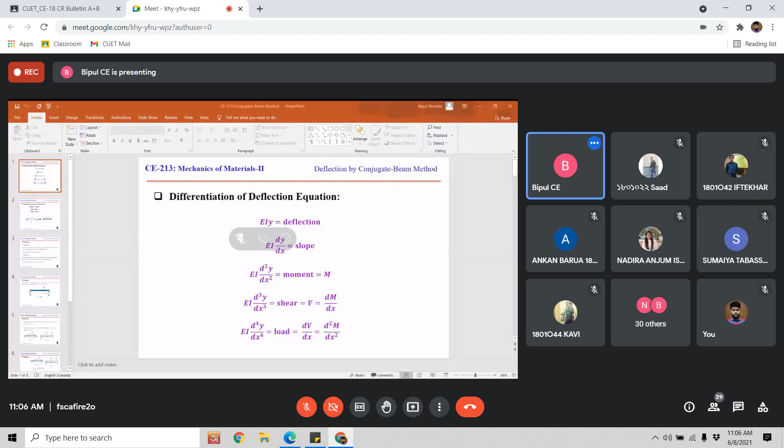Basically, is the slide visible to you? Could anybody respond? Yes, sir, visible. Okay, thank you very much.

Okay, so today I will discuss a new method to calculate slope and deflection, that is the conjugate beam method. It is another new method, conjugate beam. It is very much close to the area moment method. So I'll complete this method today, and next classes will be held on this method.

Okay, so if we differentiate the deflection curve with respect to the length of the structure many times, then what will we get? The first equation is the equation for deflection. EIY equals deflection. EI are the properties, one is material properties, another one is sectional properties, and Y is the deflection. So this equation indicates the deflection of a body subjected to applied load.

Then if we differentiate this equation with respect to x, meaning the length of the structure, we will get the slope of the deflection. So this equation gives the deflected shape of the structure, and this equation gives the slope of the deflected shape at different locations. Here we are differentiating this equation with respect to x.

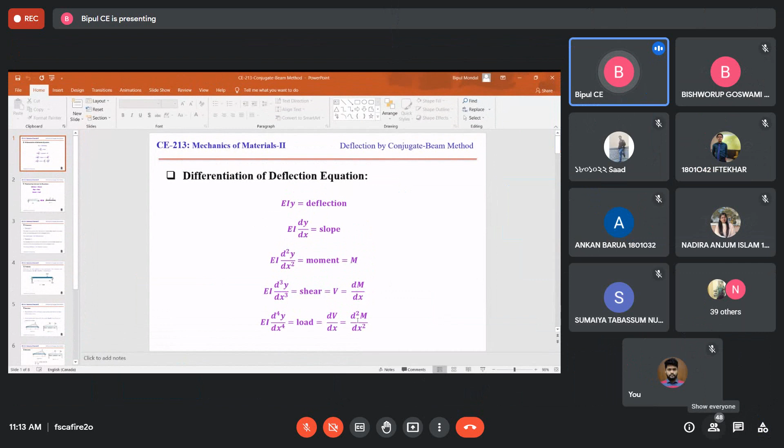In the real structure, it will be deflection, and in the imaginary structure, that will be moment. In the real structure, it will be slope; in the imaginary structure, it will be shear. In the real structure, it will be moment, and in the imaginary structure, it will be load. So the moment will be equal to the deflection, shear force will be equal to the slope, and load will be equal to the moment. So that is the relationship between the equations.

Say this is a real structure, and this structure is subjected to this load. Then we will draw the M by EI diagram of this structure for this load. Say this is the M by EI diagram acting on this beam. So in case of the imaginary beam or conjugate beam, we will assume that it is not moment, it is load. It is nothing but load. Load means, say, it is distributed load. It may be uniformly distributed or varying distributed, etc. But it is load. It is not the M by EI diagram.

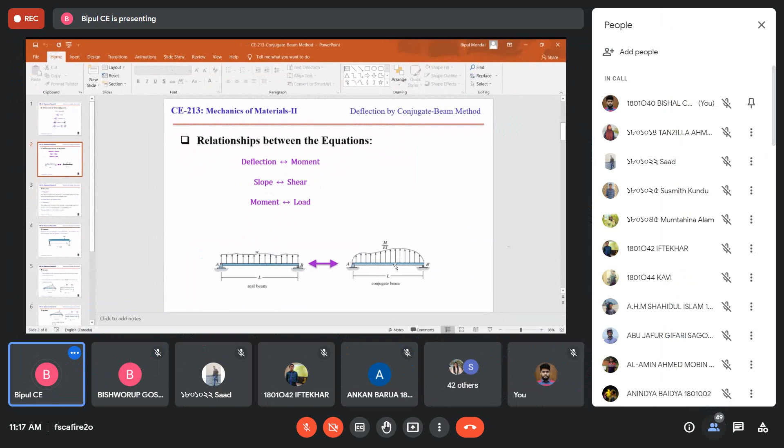First of all, say this is a real beam, and this real beam is subjected to this type of load. Then we will draw the M by EI diagram of this beam for this load. So that is the M by EI diagram. Then we will assume that this is not M by EI. This is the load acting on this beam. Then the shear force at any point due to this load will be similar to the slope of that point, and the moment of this load will be equal to the deflection of the point. Sorry.

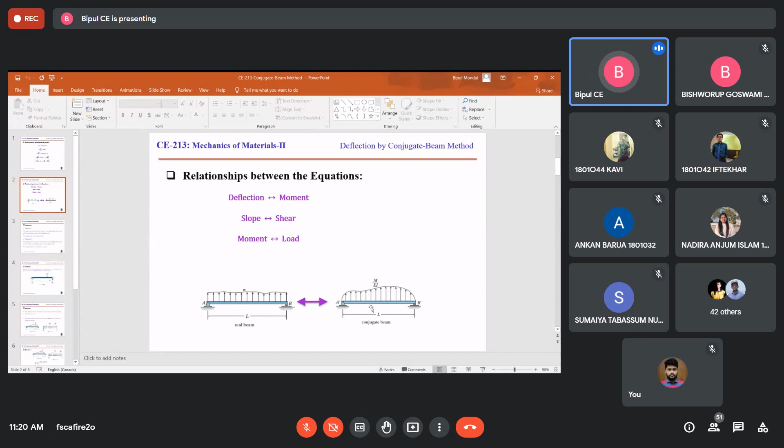The shear force will be similar to the slope, and moment will be similar to the deflection. Okay, moment will be similar to the deflection. And there are two theorems here, theorem 1 and theorem 2. Actually, it is nothing but what I was explaining, repeating.

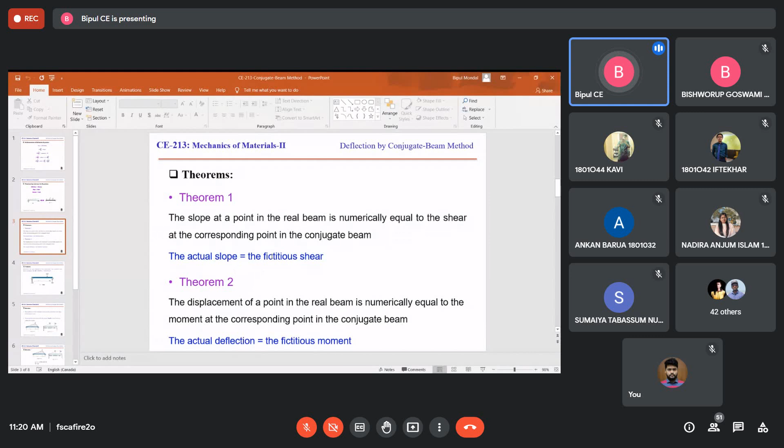The actual slope will be the fictitious shear. That means we will calculate the shear force at different points, and that will be the slope at those points. Okay, it is theorem 1, and in theorem 2, the actual deflection will be the fictitious moment. That means the moment at different locations will be equal to the deflection at those locations.

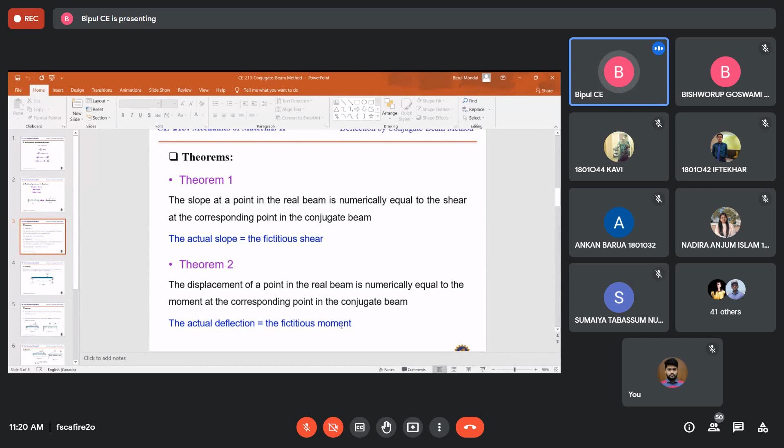Okay, now we can solve an example. So it is a simply supported beam A to B. This point is A, that point is B. The total length of the beam is 9 plus 3, 12 meter, and this beam is subjected to a concentrated load of 8 kilonewton, 9 meter away from A or 3 meter away from B.

Okay, and the modulus of elasticity of this material is 200 GPa, and moment of inertia of this section is 60 times 10 to the power 6 millimeter to the power 4. This is the sectional property, which we can get using the geometry of the cross section, and that is the material property.

Okay, now we have to determine the maximum deflection of the steel beam. So first of all, we will calculate the reactions. As it is a determinate structure, we can easily calculate the reactions at two supports. Reaction at this point is 2 kilonewton and reaction at this point is 6 kilonewton. Now we have to calculate the maximum deflection using the conjugate beam method.

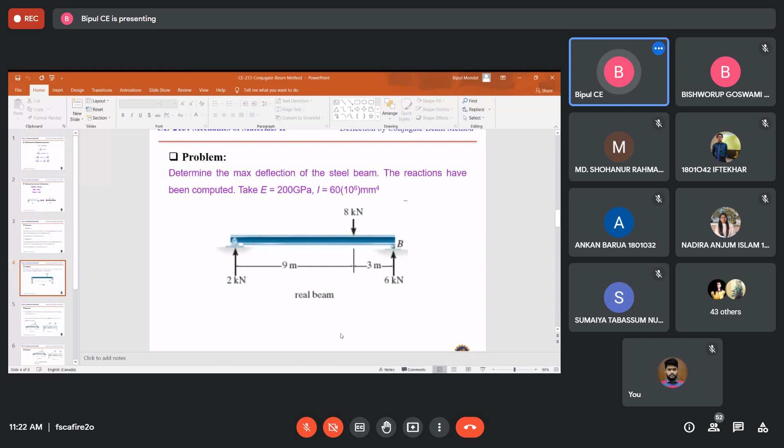To apply the conjugate beam method, first of all, we have to draw the M by EI diagram. As the reactions are known, you can draw the shear force diagram, then the bending moment diagram, and if you divide the bending moment by EI, you will get the M by EI diagram. It will be a triangle. So it is the M by EI diagram of the real beam.

Now we will assume that it is an imaginary beam, subjected to this amount of distributed load. At this point, M by EI equals 18 by EI. So for the fictitious beam, that will be the maximum value of the variable load. As the moment is positive, the force will be upward, because upward direction is positive and downward direction is negative. So the applied load will be upward.

So now it is the fictitious beam, or the conjugate beam, and this beam is subjected to this distributed load. The shear force of this beam will be equal to the slope of the beam, and the bending moment of this beam will be equal to the deflection of the beam at that point.

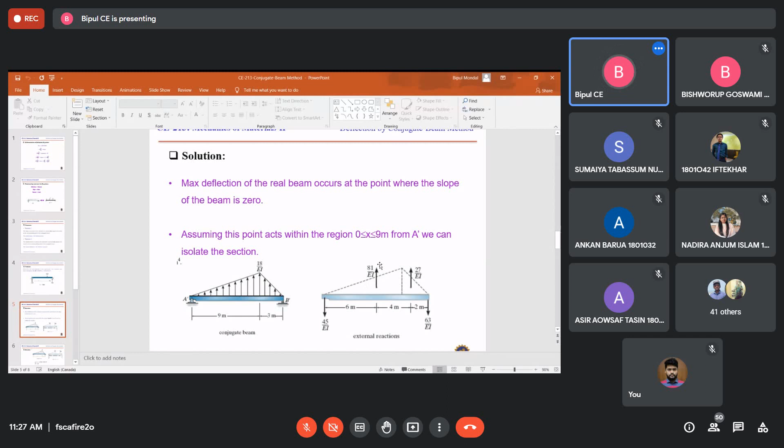Okay, so as I have assumed, the location of maximum deflection is here, and this distance is x. So we have to calculate the shear force here, because slope is nothing but the shear, and slope will be 0 at this point. That means shear force at this section will be 0. So how can we calculate the shear force? This reaction is downward, so it will be negative, minus this reaction plus this force, the total applied force.

So to calculate this applied force, you have to calculate the ordinate of this triangle. To calculate the ordinate, you can easily apply the properties of similar triangles, because there will be two similar triangles, this one and this one. So this ordinate divided by this length equals this ordinate divided by this length. This ordinate is W and this length is x, equals 18 by EI divided by 9. So from this equation you can get the value of W.

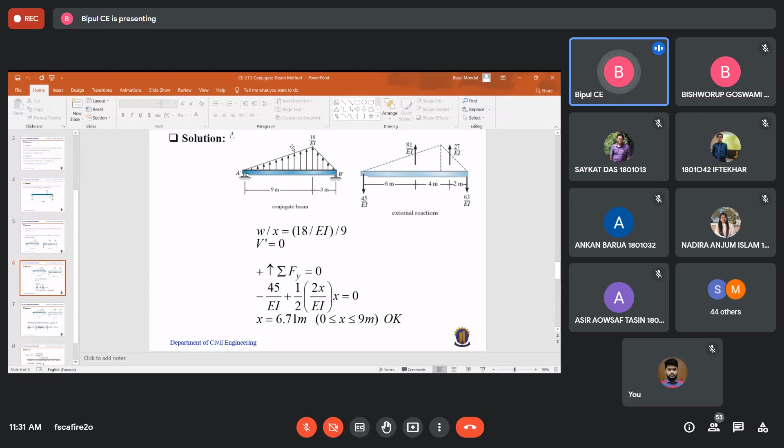But now we have to calculate the deflection, and deflection is the moment at this point due to this applied load. So what is the moment at this point? Clockwise direction positive, so this one will be negative: 45 by EI times 6.7, minus this one, which is positive clockwise. So the moment will be this. Oh, here anti-clockwise positive. So from here you will get M.

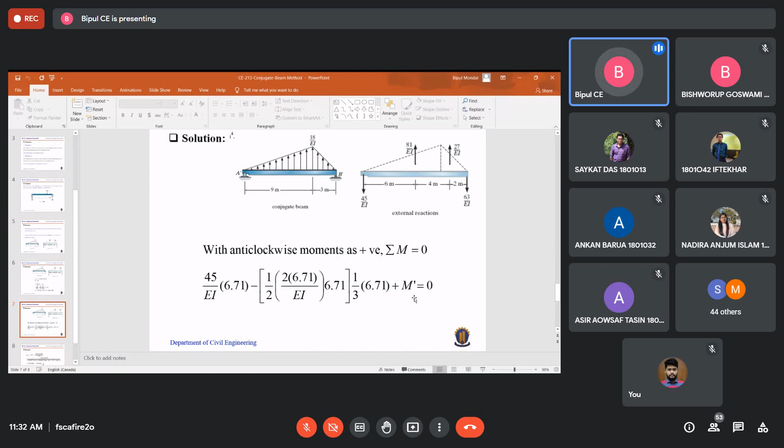It is not M, it is not the real moment. It is the bending moment for the conjugate beam. The value of bending moment is minus 16.8, and that is nothing but the deflection according to theorem 2. Theorem 2 explains that the moment of the fictitious diagram will be equal to the deflection of the real structure.

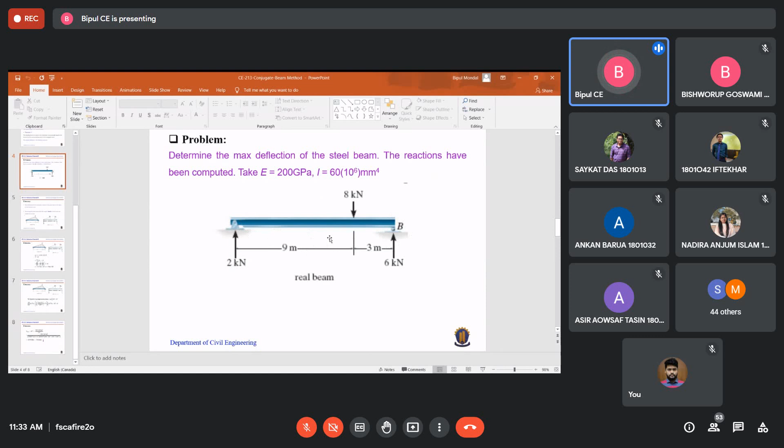So this moment will be equal to the deflection, and deflection is negative. That means deflection is downward, and it makes sense because for this type of load, definitely this beam will be deflected downward, and our result also indicates that the deflection is downward. So that is the maximum deflection of the beam, and it is located 6.71 meter from A.